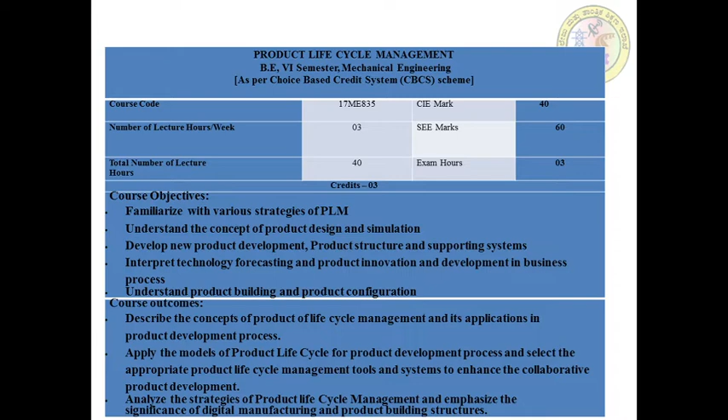Today in this session we are going to discuss product design. We have various chapters including this product design topic. We have already familiarized ourselves with the course objectives, outcomes, and scheme.

This product design chapter consists of several concepts, including engineering design, organization and decomposition in the product design process, methodical evolution in product design, concurrent engineering, design for X, design of central development model, as well as strategy for recovery at the end of life, recycling, human factors in product design, and modeling and simulation in a product. This overall design process is what we need to understand.

Whatever this chapter includes must cover the overall design process and optimization of these designs, as well as how it is enacted within these systems - meaning how it is originated, how it is produced, and how it is delivered to the customers. There is a cycle: it is created with the designer's thought, and then it ends up at the customer reaching point. Likewise, several things we need to understand.

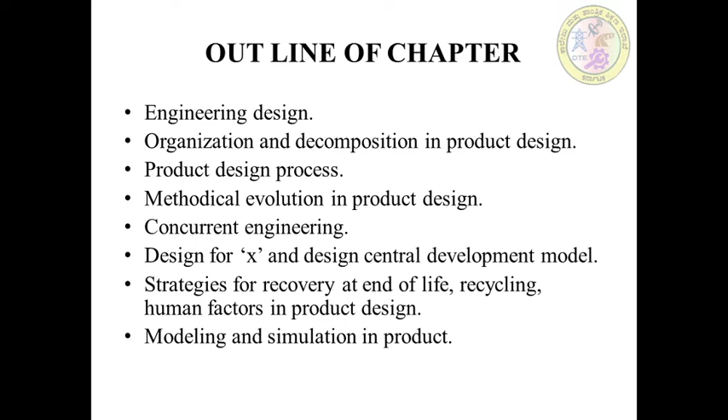While these concepts are very interesting to study, and having enthusiasm to study this subject, we need to understand these things. During this chapter, the first concept we need to understand is introduction to product design.

Every product that is manufactured is supposed to have distinguishing physical characteristics which make it attractive and useful, producing value for the customer. These characteristics are known as the design. The process employed in this regard is known as product design.

In this, we need to understand that a product is manufactured for a particular reason, to fulfill customer requirements, and it should have some physical characteristics. For example, it may be a toothpaste - the toothpaste body must have some container. That container should have some dimensions, a threaded mouth part, and nut-like substances. So it has physical characteristics, dimensions, and different features to attract the customer. It has usefulness - the overall characteristics should ensure the paste is contained within that tube.

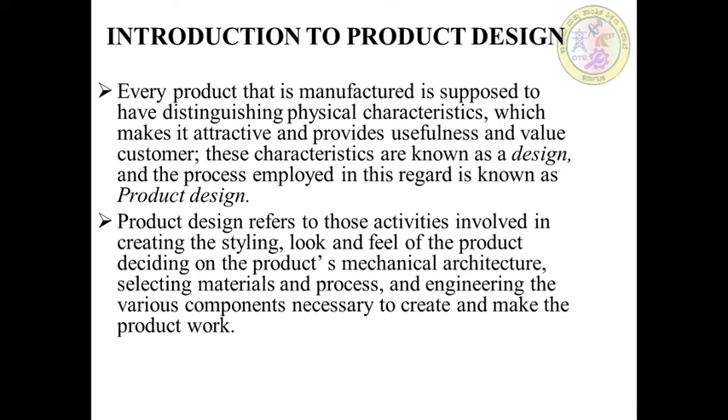Product design refers to the activities involved in creating, styling, and giving look and feel to the product - deciding on the product's mechanical architecture, selecting materials and processes, and engineering the various components necessary to create and make the product work and be useful. So we have these characteristics to understand the various aspects needed to understand product design.

Product design clearly defines the problem - what the problem is - and develops a proper solution for that problem, validating the solution with real users. So we have some problem, and we need to prepare solutions for that problem. Validation is very important too, from the perspective of the customer's usage.

Then the product design engineer works on the concept and ideas, eventually turning them into something tangible - that is, touchable by the customer. That is what tangible means. The product and its inventions are very important.

Product design is cross-functional, knowledge-intensive work, and increasingly complex. However, in today's technology-driven era, the process is supported by evolving digital tools and techniques that reduce the need for large teams and help visualize a product in great detail before it is created.

However, the success of this product still depends upon the proper design only. It has a very important role to play as far as product design is concerned.

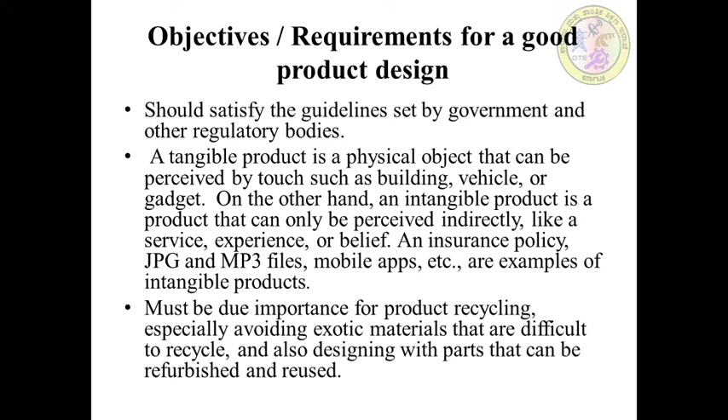It's an example of the service sector and the product design sector. Coming to that, it is important due to the need for product recycling, especially avoiding exotic materials that are difficult to recycle, and also designing with parts that can be refurbished and reused. It is a very important objective of product design.

Satisfying the customer needs and expectations, and maximizing the value for the customer at minimum cost. This product must be designed to be functional, attractive, have acceptable dimensions, and be easy to maintain. These are very important things regarding design: it should be attractive, functional, have acceptable dimensions, and be easy to maintain.

We need to understand the product design should enable cost effective production through available production methods and materials. The product design should be cost effective, and the materials also should be satisfactory and cost effective. It should satisfy the quality standards of the end product, and must enhance the revenue and competitiveness of the organization in the market. It is very important that the product fulfills quality standards and creates more revenue and competitiveness with other organizations in the market.

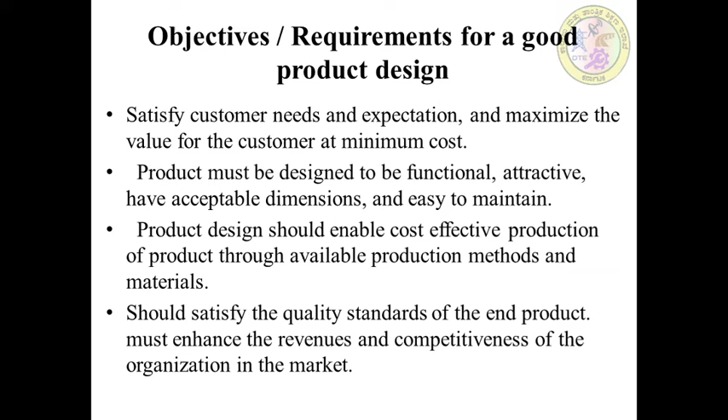Coming to the benefits of good product design, we need to attract more customers by giving an organization a credit to go above their competition, and make a business grow by enhancing profitability and turnover, because it transforms the needs of customers into the desired shape and value of the product demands.

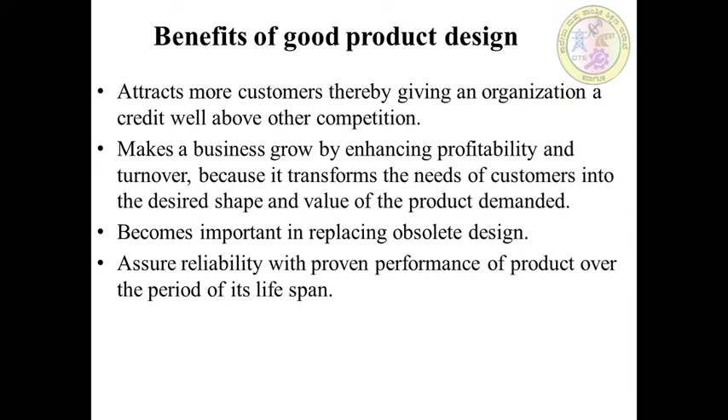It becomes important in replacing the obsolete design, ensuring reliability with proven performance of the product over the period of its lifespan. These are all the advantages we need to understand, and it makes the customer comfortable and easy to use.

Good design satisfies the customer, this is a well known truth. Very good design will bring satisfaction for the customer, and communicate the purpose of the product to its market. This is also an important point. Assured quality product with guaranteed customer satisfaction means whenever we are assuring the quality of the product with a guarantee card, it will satisfy customer satisfaction.

However, providing some excessive warranty card for 6 months or 1 month or 1 year will make the product very good and interesting to have. It is also important that this leads to standardization of the process, product, and its components, leading to interchangeability and better services. We should also avoid product redesign, thereby reducing the time, cost, and labor involved in the redesigning process.

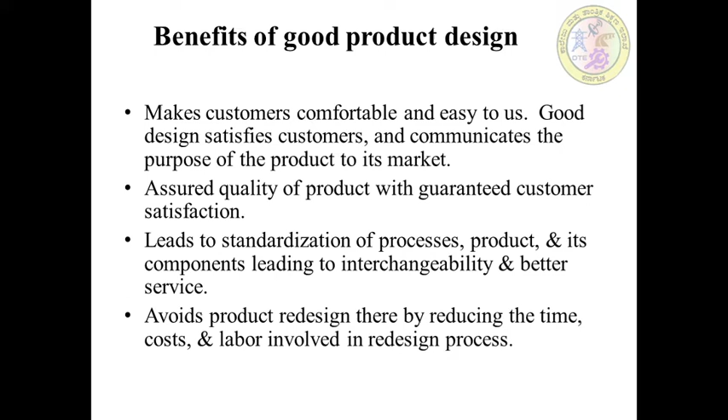So these are all very important advantages of this product design. Now coming to engineering design.

Engineering design is the discipline which makes an idea as well as a concept into the product that fulfills all the requirements of a customer. Engineers involved in engineering design combine science, technology, and creativity to develop the product.

The various steps involved in engineering design are as follows: identify the design needs and conduct research, select a solution, brainstorm and plan, build a prototype, test, evaluate, and redesign to improve. These are all very important engineering design concepts.

So as to understand these particular things, let's explain each sub-standard, starting with identify the design needs. This first step usually contains a list of product functions and customer requirements and expectations about the product features. That is very important.

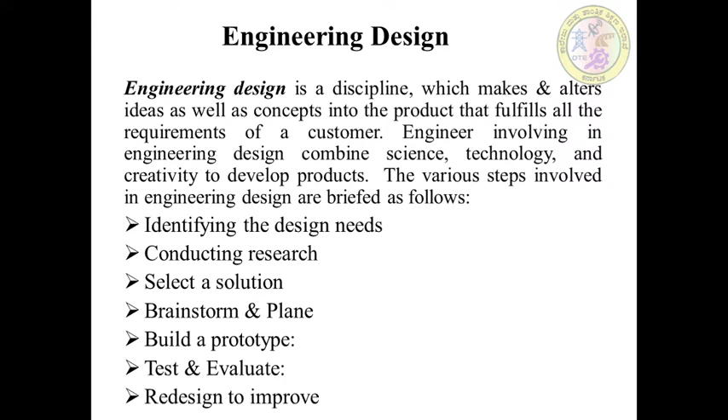Coming to product design process, it's a very important concept in this module. Design process is a series of steps which different companies focus on differently. While it is impossible to provide a universal design process that fits all products, it is still possible to describe a general flow of designing a new product.

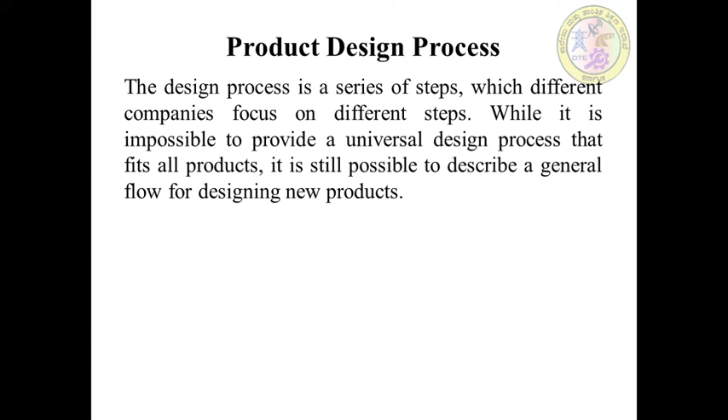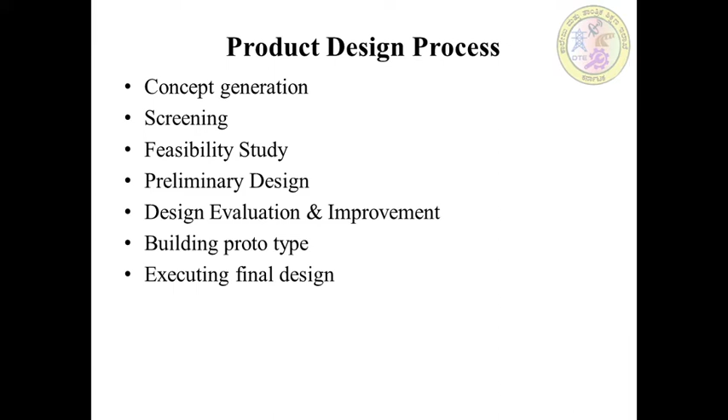That will include several steps that we need to understand. Whenever product design is conceived, we need to understand these subtopics: concept generation, screening, feasibility studies, preliminary design, design evaluation and improvement, building prototype, and executing final design. Coming to concept generation, the concept behind the product design is developed based on the ideas and requirements of the product, concluded from the customer and potential market.

Whenever the concept is generated, we need to conduct a product survey from the customer viewpoint. Customer demand, customer ideas, and the requirements of that particular product are concluded from the customer's point of view and the potential of that market. Different concepts related to the product's shape, size, functional requirements, and other characteristics are developed.

The idea required to develop the concept is usually tied with the research and development team, that is the R&D team, and lies out of the scope of a product designer.

A prototype is a physical model of an idea that enables experimenting and testing it before building the full product or solution.

A product concept is an approximate description of the technology and working principle that forms the particular product. In concise terms, it describes how the product will satisfy customer needs. It is usually expressed in the form of a sketch and 3D models, accompanied with necessary details understood through virtual models and some prototypes.

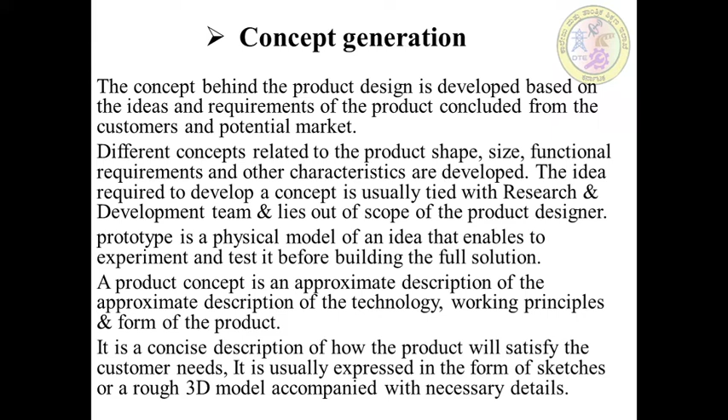This is why concept generation is very important, and this has to be accepted as far as product design and the design process is concerned.

Coming to screening, once a suitable number of concepts have been generated, it is necessary to choose the design that must be suitable for fulfillment of the particular product requirements set out. The product design specification should be used as the basis for any decision being made.

The chosen concept will be developed in detail. This concept of screening is very important, as the concept that is set out will be screened to ensure it fulfills the product requirements for any particular product. So we need to understand how the chosen concept will develop into details.

Feasibility studies are also an important point as far as product design is concerned. Conducting a feasibility study of a concept helps take a closer look at all details of the product design, which in turn helps transform the product concept into a product layout that defines the various subsystems or functional components required.

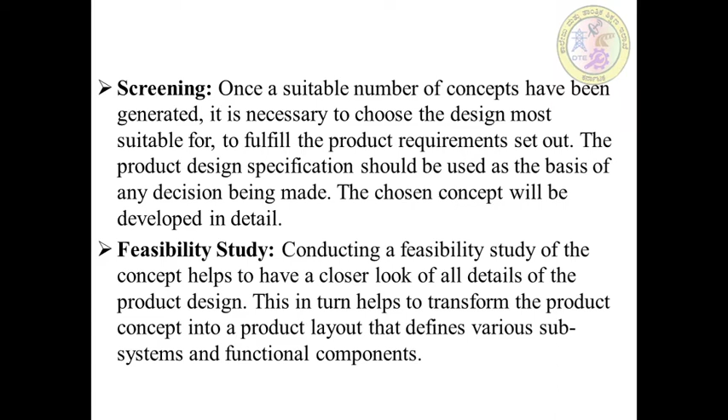Feasibility is essentially about fitment, meaning whether it is possible or not - that kind of study is known as feasibility studies. Coming to preliminary design, the product layout developed in the previous stage is transformed into a detailed design with all dimensions and specifications necessary to make the design product very specific. This includes detailed drawings of the design, information related to selection of material, size and shape, and definition of any geometry involved in creating that particular product.

Details regarding assembly of any component produced in the design stage, and other sequences of activities, will be developed. Whenever producing any product, the very initial step in design is sketching and creating some drawings and models - that is very important. This stage is known as preliminary design.

And coming to design, evaluation and improvement: the purpose of this stage is to examine the preliminary design to determine any requirement for further improvement. There is a need to verify in detail the degree to which the design produces results matching the design specification.

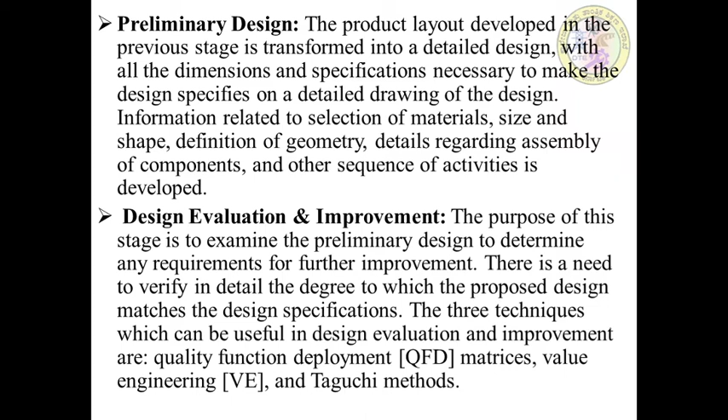And coming to building a prototype, which is very important. A prototype is a physical or virtual version of the improved design created for testing and refining the functionality of the design. This stage helps identify any flaws and rectify them to eliminate quality-compromising elements from the design.

A prototype may be physical or virtual, created using software. A physical body is the actual product, but not created at full size. For example, if a compressor design handles 1 meter cube of air, we create a prototype for a much smaller volume. If 1000 meter cube of air is handled by a product, we create something like a 10 meter cube version. That prototype is created and examined, so this execution is very important.

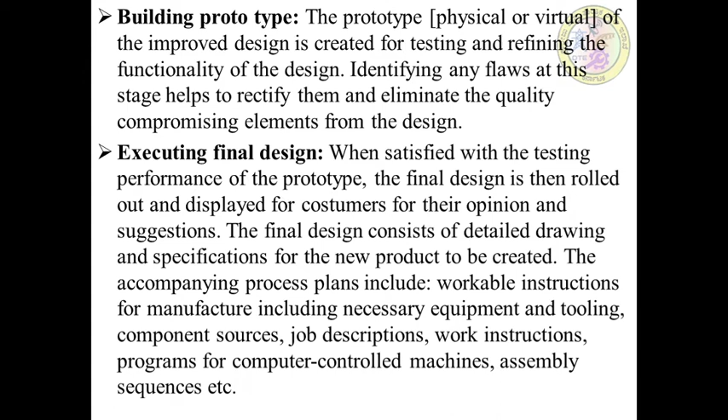When executing the final design, once the testing performance of the prototype is satisfied, the final design is rolled out, displaying it to the customer for their opinion and suggestions. The final design consists of detailed drawings and specifications for the new product to be created. The accompanying process plan includes workable instructions for manufacturing, including necessary equipment and tooling, component sources, job descriptions, work instructions, programs for computer-controlled machines, and assembly sequences. These are all important for the final design execution stage.

We need to understand organization and decomposition in product design. Product design is a complex process involving various activities with a series of steps and people involved, including the research and development team, design engineer team, product makers, and examining team, all executing this process in an active way.

Such a series of steps involves organizing the people, which arises a need to structure or organize the various activities in order to streamline the process, and also to break down and decompose complex activities into executable subtasks that can be handled more easily. This is a very important concept, and this section deals with organization and decomposition in the product design process.

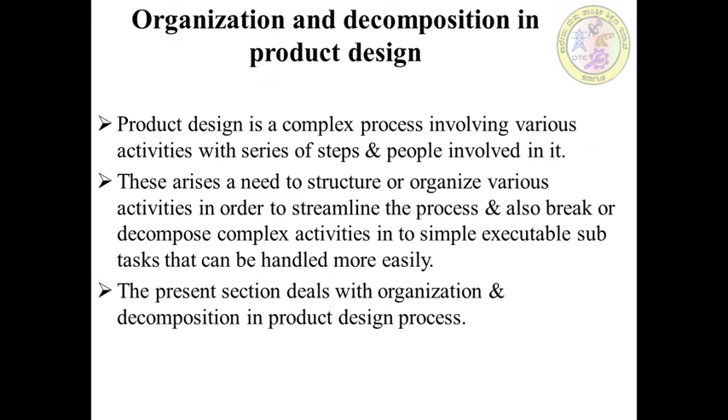Organizing product design: product design begins with defining the functional requirements that satisfy a given set of needs, and ends with the creation of physical objects satisfying those requirements. The process involves various activities and the interaction and iteration of these activities to satisfy the needs and expectations of the desired product.

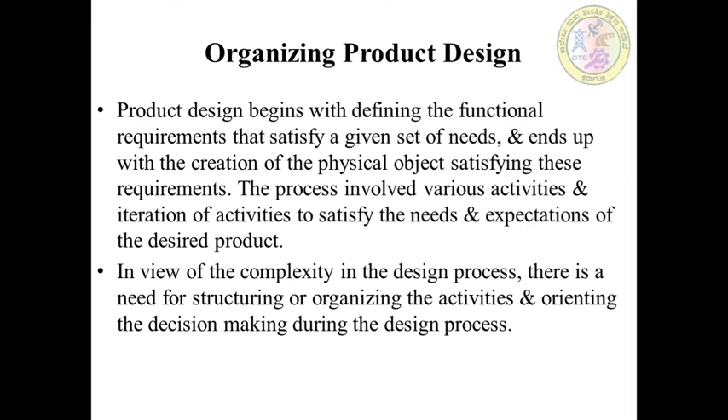Given the complexity in the design process, there is a need for structuring and organizing the activities, or orienting the decision making during this design process. This overall organizing process and decision making are very important, explaining the complexities of design in such a manner that activities and orientation matter. The sequence of activities is conceived so that product design proceeds from the abstract to the concrete.

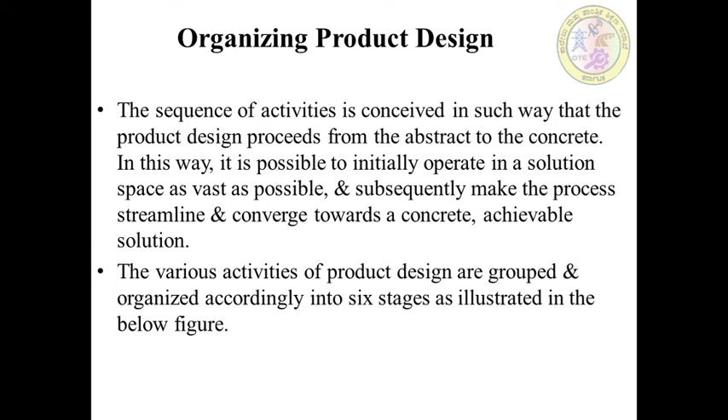In this way, it is possible to initially operate in a solution space as vast as possible and subsequently make this process narrow down and converge towards concrete and achievable solutions. Overall, organizing the product design is very important, as it is concerned with decomposition and organizing these components.

Various activities of product design are grouped and organized into six stages, as illustrated in the figure. Whenever an idea is generated, the requirement includes this concept. Before concept generation, ideas from people and customer requirements are initiated through a survey. From the people survey and customer needs, we generate the concept. Concept generation is very important, as a number of concepts are generated, and the effective way to select outcomes is called concept screening.

After screening the concept, from all concepts we select some effective concepts. So we have effective concepts after screening the concept generation. Then comes the feasibility study, where we check if the effective concept is possible or not, and that is the outcome of this feasibility study.

After this, the product layout with subsystems and functional components is the outcome. Then preliminary design processing is started, meaning after the feasibility study we initiate preliminary design, where drawings and other details are created. Detailing of the design is a very important outcome.

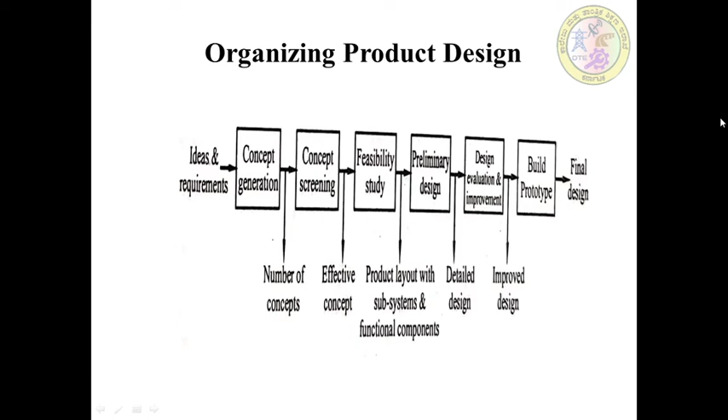Coming to decomposition in product design: in the design of a complex product, it becomes necessary to divide or break the design problem into smaller sub-problems, which can be handled more easily and later combined to integrate the overall design to arrive at the final solution.

In complex product design, we segregate into sub-problems and iterate that process, so we can separately conduct tests on sub-problems, and finally combine them to get the final solution. For example, as shown in the figure, consider the design of a product like a cycle.

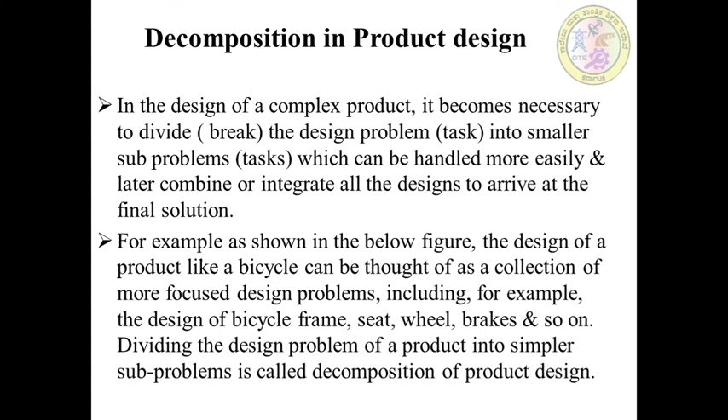Development teams are assigned to each design problem, which may represent a component or subsystem of the larger system. Each sub-problem can be further divided into even simpler subtasks, and this division process can be repeated until the team members agree that each subtask is simple enough to work with.

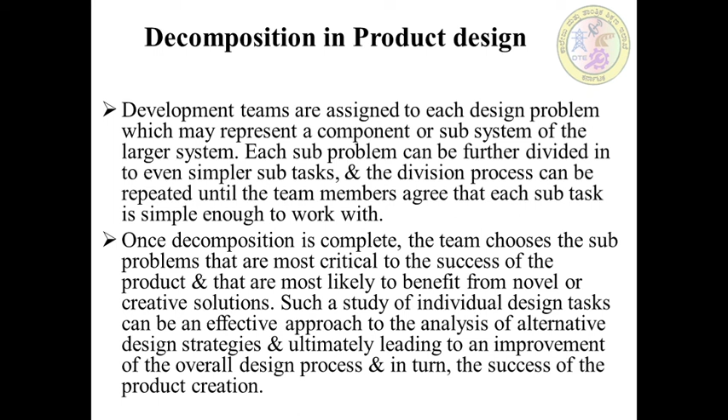Once the decomposition is complete, the team chooses which sub-problems are critical or non-critical, and each such individually studied design task can be effectively approached through analysis of alternative design strategies, ultimately leading to improvement of the overall design process, and in turn, the success of any particular product creation.